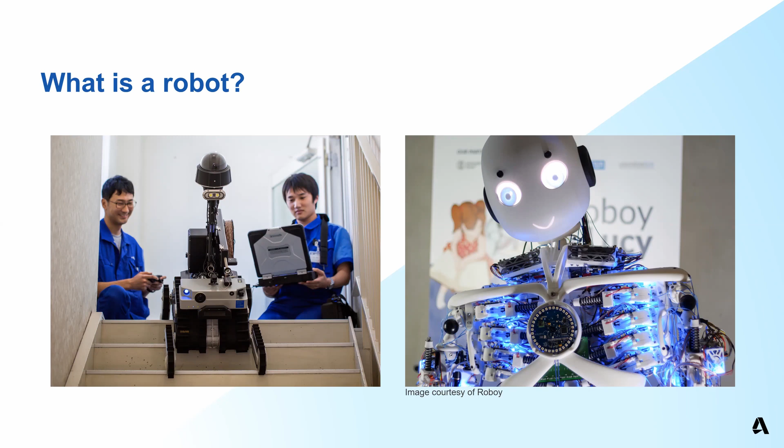We do a lot of making in this world. These robots aren't actually helping us make anything, even though they are a great help to this world. Industrial robots are designed to help us make things. They have the ability to do repetitive tasks that we humans may not want to do or cannot do.

We can see these robots in our technology center, Birmingham in the UK on the left, and the Boston Technology Center on the right. These are able to do tasks such as large-scale milling and large format 3D printing. They're very much like a CNC mill or a desktop 3D printer. So why would we actually look at these robots instead of a larger CNC or a larger 3D printer?

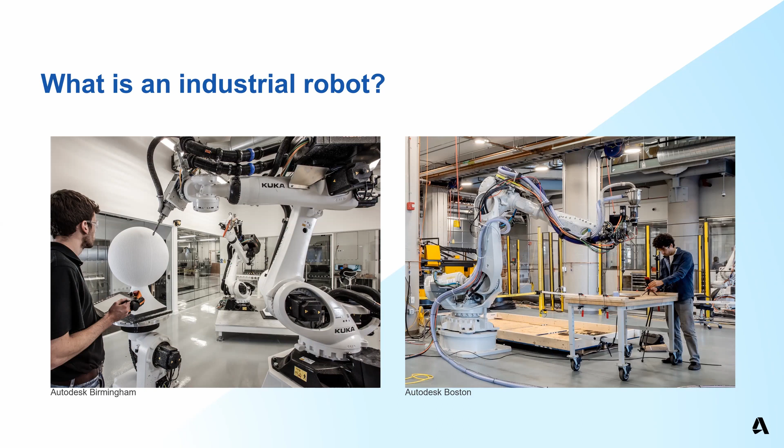In machine shops and production environments, one question always seems to arise. Are we being productive? As a follow-on to that, we ask another question. How can we be more productive? We can then progress to asking more specific questions, such as how can we achieve higher productivity with robots?

We've had a brief look at robots, but we need to diverge for a moment and ask questions that have come up, such as what is productivity? Expressed as a ratio of an aggregate output to a single input, or in a manufacturing sense, what can you make with the finite resources that you have?

So then the next question, what is increased productivity? It's going to be different for every single company, but a few examples might sound like making the part faster, reducing your upfront costs, reducing floor space, a smaller workforce, or many other possibilities. So how can robots, and industrial robots specifically, allow us to have an increased productivity? We shall return to the intent of this presentation and discuss the reasons we would choose a robot instead of a CNC or a standard 3D printer.

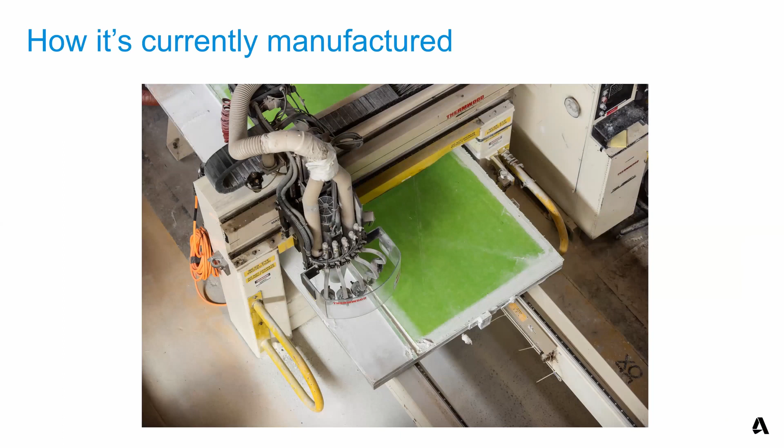The current manufacturing process for the front wall starts as a sheet of laminated material. There's a protective outside and an insulating core that allows us to protect from the elements such as rain, sun, heat, and cold. This sheet is loaded onto a CNC router that cuts the windows and the doors and drills the holes where it attaches to the other walls and also the supporting structure.

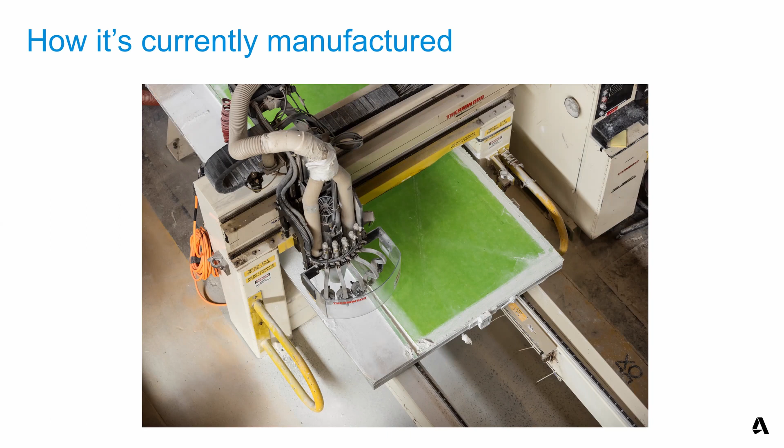Next, the outside dimensions of the wall are cut so that the panel is at its final shape. The last thing to do for this finished wall panel is to remove it from the router, and a new blank can be put in its place. One of the reasons this method is used is that it can be very fast to produce a single panel, and it's very repeatable.

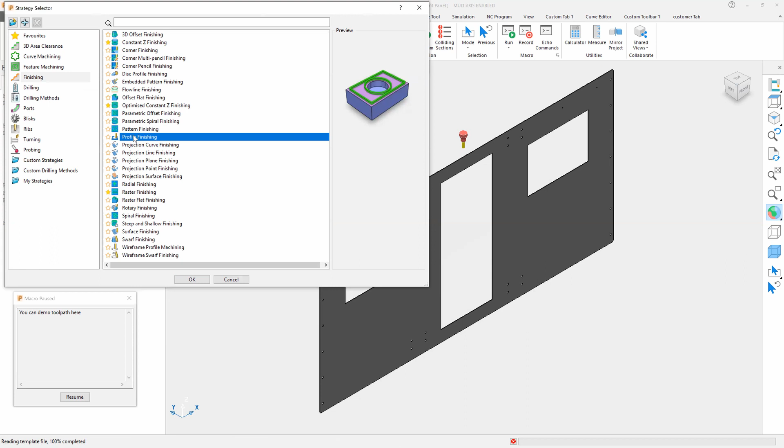As you can see, we've moved the front panel model into our software PowerMill to be able to program the toolpath that will drive our CNC machine. It's a very simple workflow. Start by choosing the toolpath that we will use to cut the profile of our part. And then we follow the linear workflow from top to bottom to be able to align the tool to a specific z-axis or our toolpath work plane.

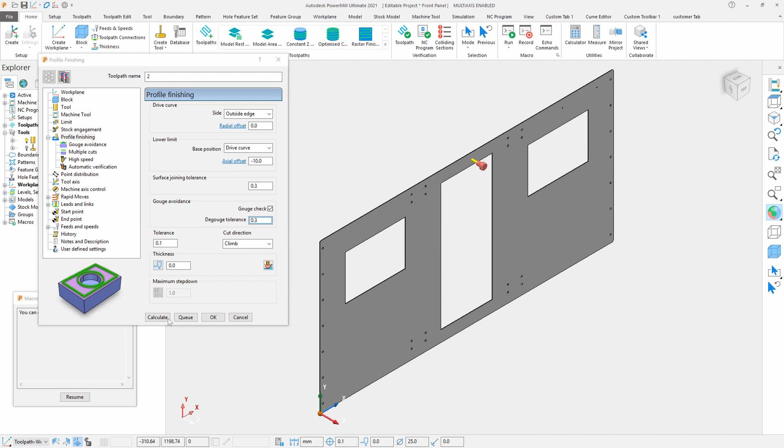We'll choose our machinable area, which in this sense is the entire part. We'll make sure that we have the correct tool, and then move to our settings page to make sure that our tolerances and our actual cutting location is defined. When we press calculate on this toolpath, what we're going to see is that our toolpath shows up as a cutting move in green, and that our red dashed sections are rapid moves from where the toolpath starts and in between each of these sections.

Now, one thing that we can notice here is that our lead in and lead out moves for these toolpaths are in a different color as well, and these can be modified outside of the toolpath if we need to change them. Maybe this height needs to be a little bit higher so that we have a little bit more clearance for our tools. So if I make this, for instance, 150, when I press apply, we can see this automatic update for a longer lead-in.

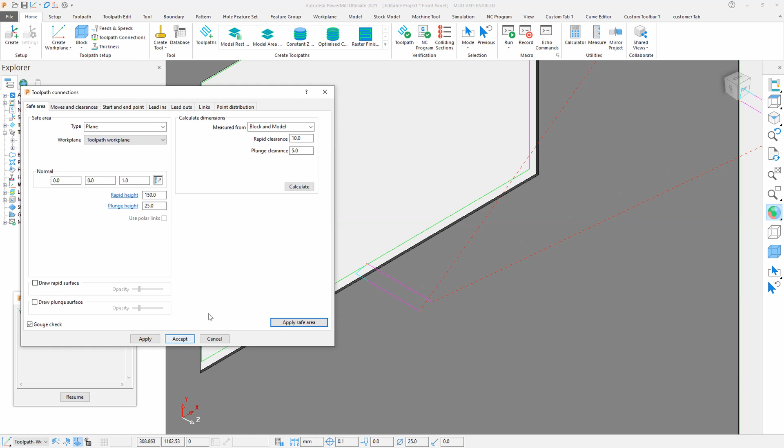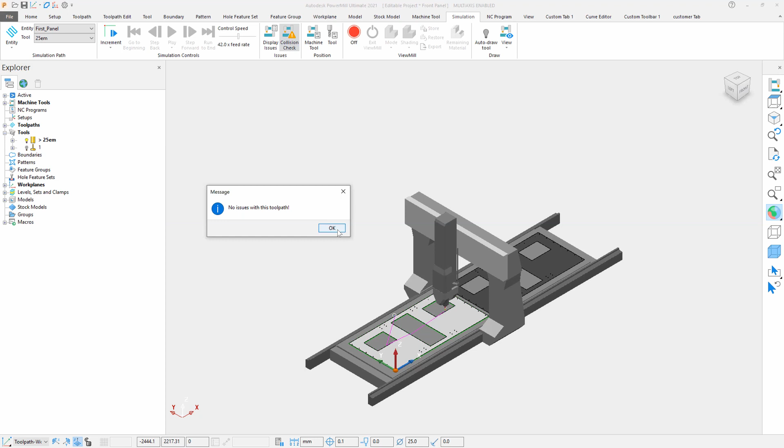Now, putting this toolpath on the CNC machine to watch the simulation, we can see that tool and the motion that this machine will take to be able to cut the outside profile of this part, as well as cutting the windows and the doors. As this finishes up, we will note that this toolpath had no issues throughout the entire part on this first panel. Now, this machine is very long, so we have put a second panel on to this bed of this machine to be able to cut it.

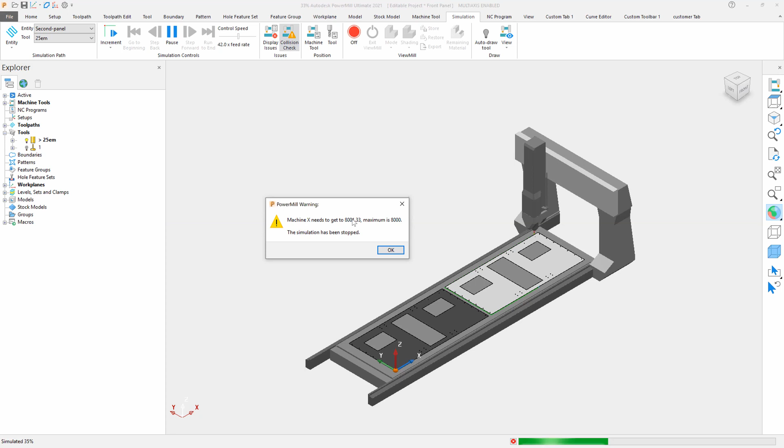Now, this is a very long machine, and what we'll see is that at a certain point, we actually run out of travel on this machine, even though it is so big. This warning message that has popped up has let us know that we have exceeded the maximum travel of our machine, which is 8 meters, by a little bit. Now, looking at that issue that's brought up in our simulation, we can actually see the simulation and the area that our machine is able to reach. So in a sense, this is a great way for me to predict whether this is going to work on the CNC that I have.

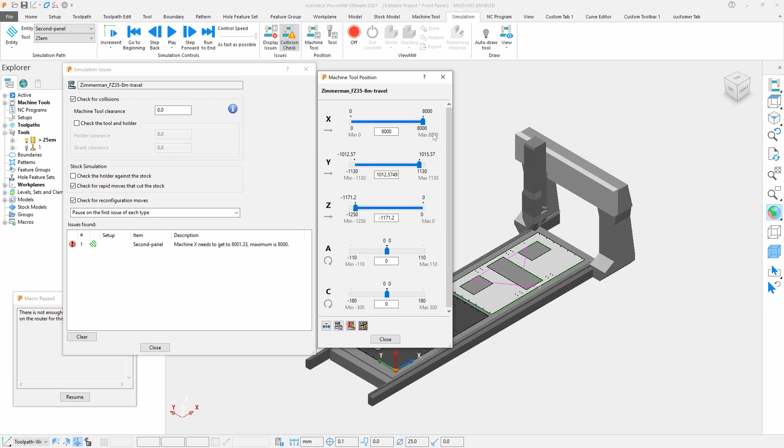In this case, if the panels change size at all, then we may not be able to fit them on this machine. Now, if they do get smaller, that's very beneficial to us. But if they have to modify this to be just a little bit longer, we may not be able to squish them, and we may have spent lots of money to be able to only cut one part at a time. So as we've seen in PowerMill, this is a far improved process from measuring and cutting these holes out by hand, even if it may be power tool assisted.

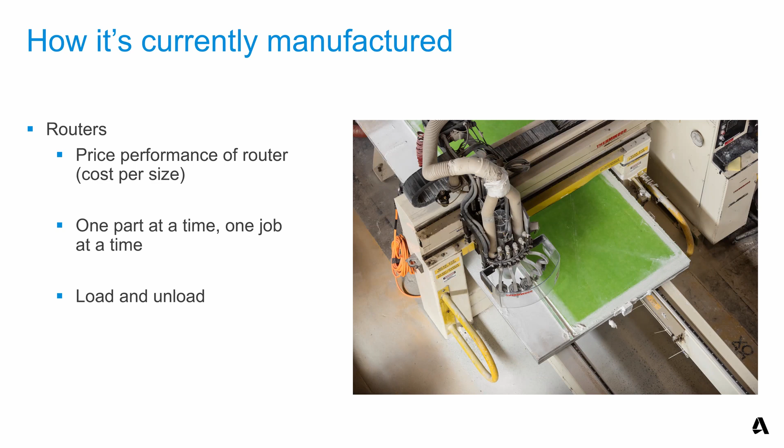I did show that we did have the possibility to show the two panels next to each other, but this still requires an operator to switch programs and possibly change the setup if we have to change from the front panel to the side panels, or to the roof or the floor. One last downside is that the router is not able to cut while someone, a human, is loading or unloading the material. Think about these things, and we'll have a look at the areas where robots excel and where we can see them help in this situation.

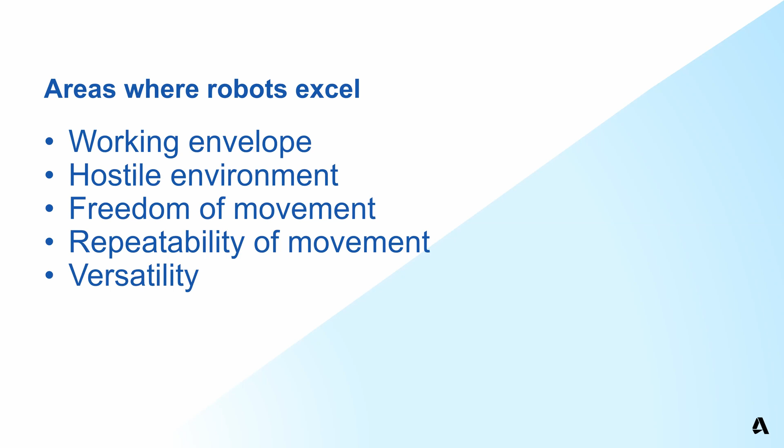In this next section, we will look at areas where the robots can excel. From the working envelope to versatility, robots have the ability to increase productivity with a bunch of other possible areas as well. In the world of traditional machine tools, the envelope size is exponentially linked with cost.

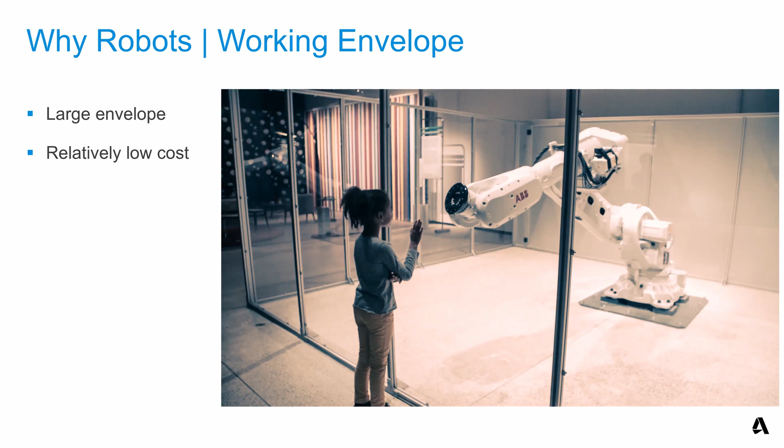That 8-meter machine is going to be so much more expensive than something that's only 4 meters long, for instance. To achieve the envelope size similar to the ones seen in this image would be many hundreds of thousands of dollars. In the case of robots, large working envelopes can be enjoyed for a fraction of the capital outlay. Robots don't necessarily need to be big, though. Smaller robots can actually be just as beneficial due to many other factors, which we'll see in the coming slides.

Irrelevant of the specific job or task, hostile work environments are places that humans don't want to be. Think for a moment about situations such as working with a radioactive or other toxic material. Just being around these and interacting with these materials can cause serious injury, or even worse. How about working on another planet or in the vacuum of space? These are just a few examples to look towards robots as a solution.

Now, robots still need some amount of human interaction to be implemented, but the work in the hazardous environment can be avoided. Reducing or eliminating exposure to these toxic materials can reduce the cost and even possible problematic outcomes. So why do robots excel in hostile environments? It's due to their freedom of movement. Technology and manufactured parts become more complex and intricate. And with this, we rely more and more on automation due to the ability to move the objects more freely in ways that humans can't.

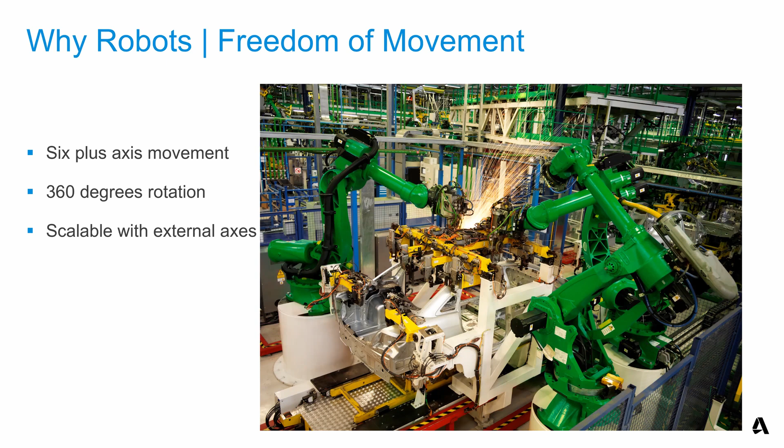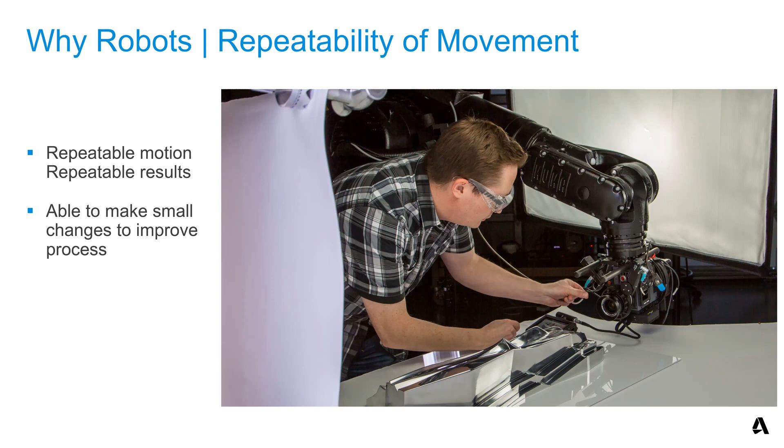Manufactured parts are not the only place where repeatable movement is desired. With the growing awareness and adoption of robotics in all aspects, we are starting to see other industries, such as film and video, utilize robots to have repeatable camera motion while filming a scene. This allows set pieces to be moved, tweaked to get it just right. This also allows actors to perfect their movement or their lines in scenes where that camera is moving. Optimization and perfection in repetition is another way to improve productivity.

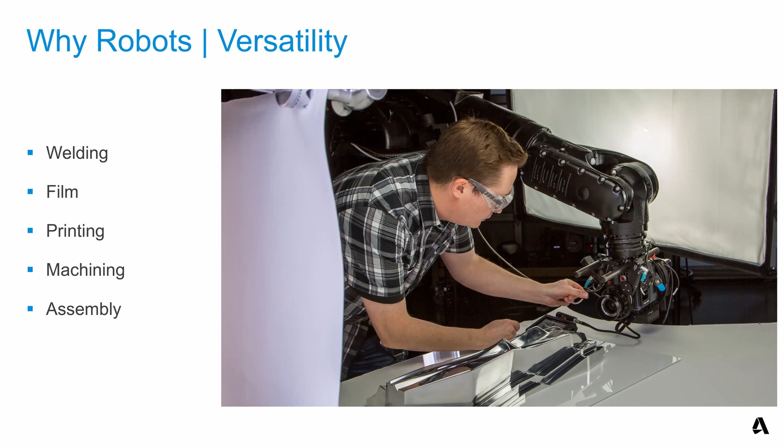This not only is a great example of repeatability of movement, but also the versatility of industrial robots. They're not just for manufacturing and can be used in a lot of different industries. We've seen examples of welding, printing, film, and we'll see more. With the robots used to aid filmmakers, we will note that not all scenes are actually inside a studio, and this brings us to our next advantage, which is mobility.

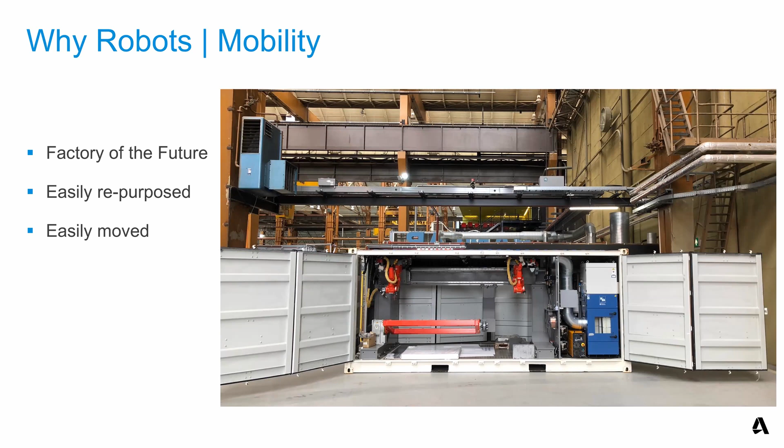Mobility is a key aspect of robotics, which is mainly due to the initial small footprint compared to the working envelope of the robot. Industrial robots can be mounted in almost any orientation as opposed to a CNC or a 3D printer that relies on gravity. This container was created with two robots hanging on a rail and also a rotating table beneath them. This container is easily transported as a microfactory on the back of a truck or a lorry, depending on where you're from.

This set of robots is purposed with directed energy deposition end effectors, specifically WAAM, wire arc additive manufacturing, intended to work together as a team to produce metal components quickly. These can be critical components on a construction job site or a repair component where shipping the replacement would take far too long or be just too costly to ship. Think about being in the remote center of a desert or in the middle of an ocean. Both of these are examples of just-in-time manufacturing.

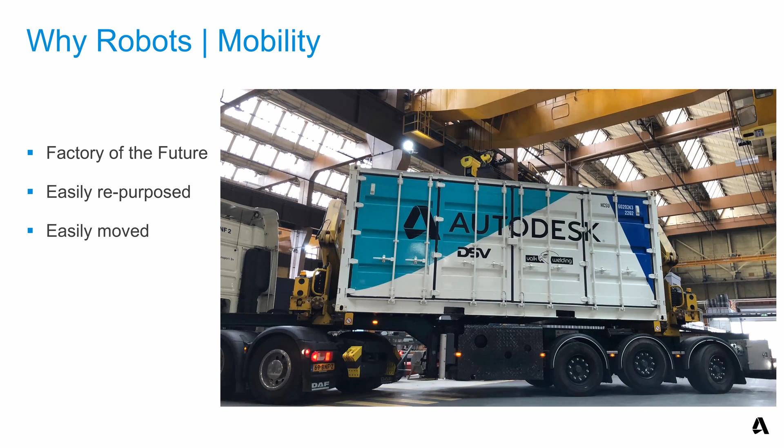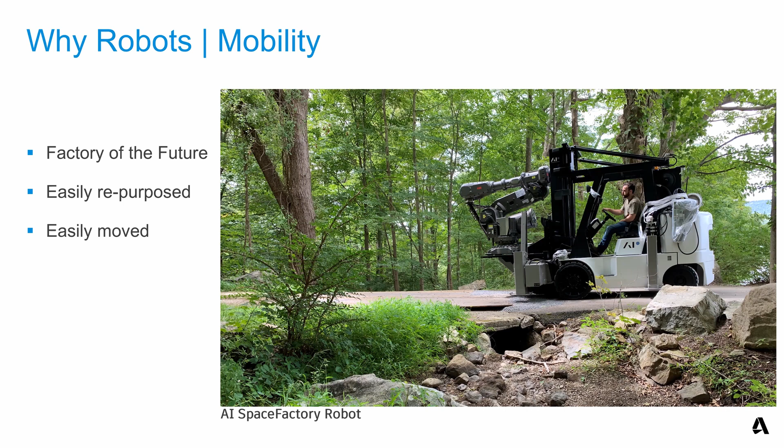Another example that joins a few of these is portable building robots. It's a test here on Earth for printing habitats in other worlds, bringing together mobility and overcoming hostile work environments off-planet. I mentioned earlier the end effector of the container robot. You can see it here close up. Notice there's actually two parts on this end effector: the first being the WAAM stinger on the left side, and the second being a plasma cutter on the right side.

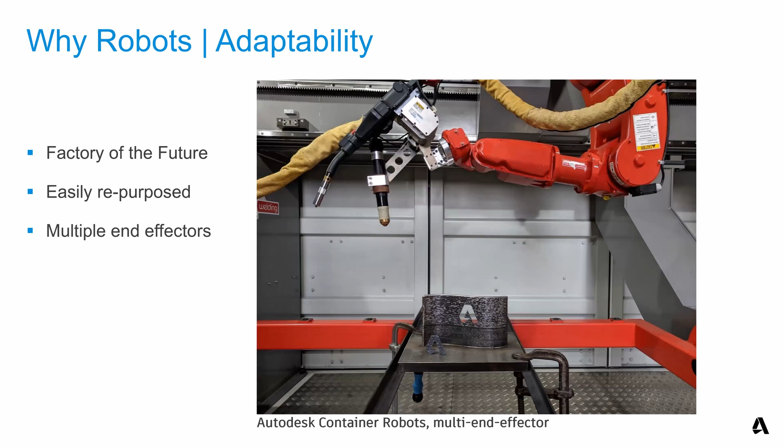Adaptability, which is nearly synonymous with versatility, but in this sense, it means that because the end effector of the robot can change, it's very easy to repurpose this robot to perform another different task. This example shows two tools on the robot end, but there's also the ability to change the end effector on the fly, such as that in our technology centers.

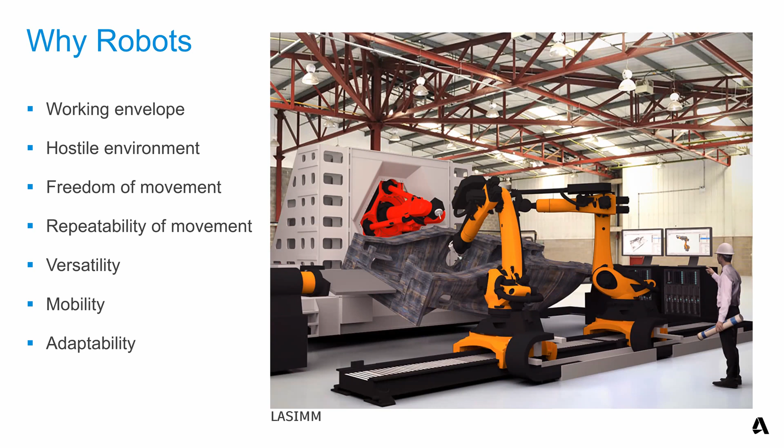What are the key aspects in our example that we can use to increase our productivity? Let's have a look. Utilizing the robot on a rail, we can actually optimize some of the floor space where these panels are being produced. We can also change the orientation of the panels to further reduce floor space and make it easier to load blank panels and unload the finished parts.

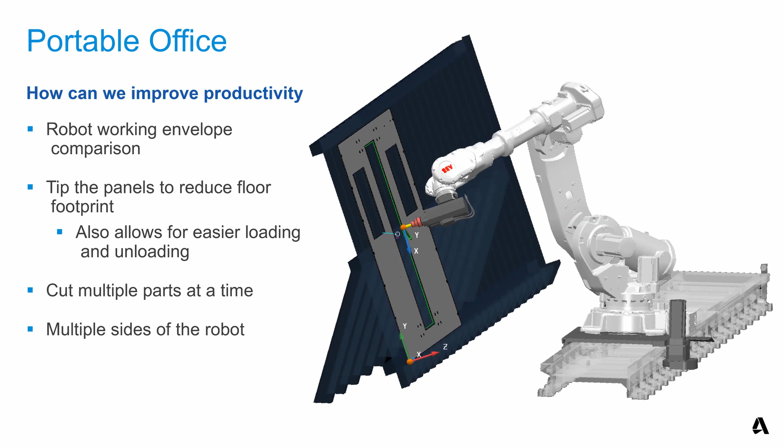Having the ability to move the robot on the longer rail gives the ability for 2 or more setup areas. This means that multiples of the same part can be cut at the same time, or alternatively, multiple jobs can be set up at once. For instance, cutting one of each of the walls. A cell could feasibly complete all of the wall sections required for a modular office in one cycle. Both of these ways will improve productivity.

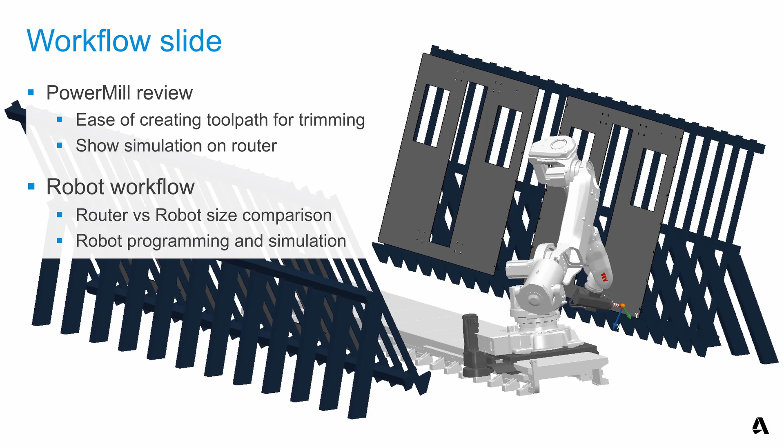You'll remember that we showed how easy it was to create that toolpath in PowerMill and the ability to simulate to see issues before we send this program to the shop floor. To demonstrate what these processes look like for the robot, we're going to step back into PowerMill and show the comparison of the size on the router, robot programming, and also the simulation on the robot. In this case, we've overlaid and superimposed that router on top of our robot.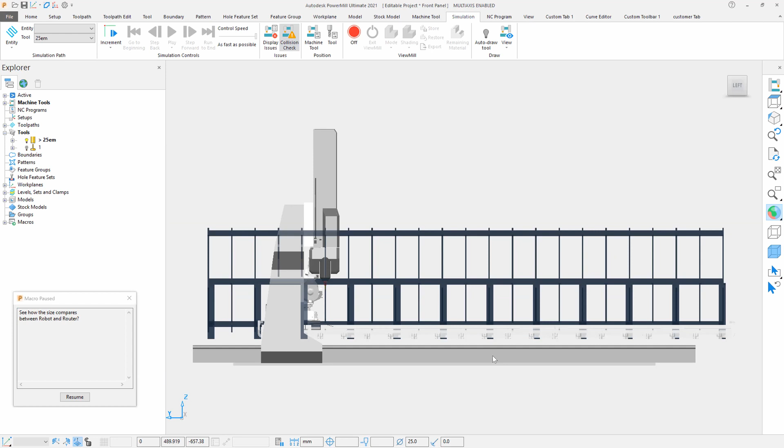And as we can see from this view here, our robot with 2 walls is just slightly wider than our mill. And if we were to look at the left view, we can see that they're really pretty close to the same length as well. We do save a little bit on the height, but for the most part, we can come to the conclusion that for the same amount of floor space of the router, which we were having trouble fitting 2 components, we could fit a lot more. So now that we've actually put the part on the robot, we can see all of the extra space on that wall to put more components.

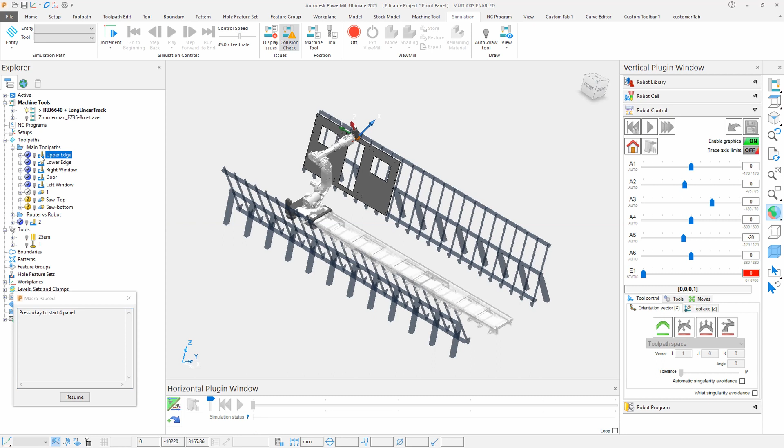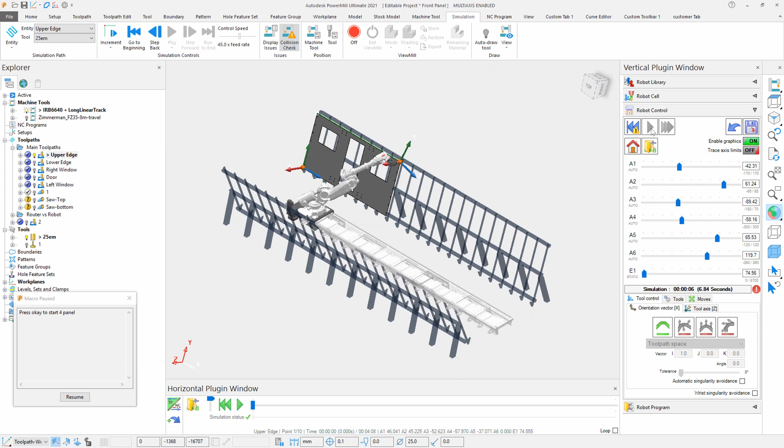We're going to start with programming just one small toolpath for now, which is the upper edge of our front panel. With this, on our right side, we can see our vertical plugin window has the robot controls, where I can attach the tool to the start point and then press play to watch that simulation. Now we do see that this robot is able to machine this entire component without too much movement, but it may not be the most optimized movement that we want to see for this robot.

We can utilize that linear rail to be able to reduce a lot of the motion that that robot sees. Changing the priority of that axis to high and reattaching that tool, we can see that there's a lot less motion of that robot to cut that top portion of the panel. We would then save this simulation and load it into an NC program to then send to the robot.

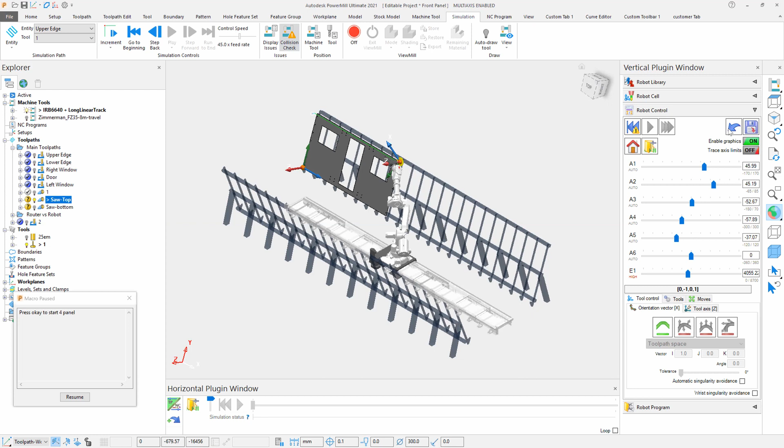I want to talk about a quick digression, because one of the ways that robots can definitely speed up our process and make it a little bit better is the ability to just turn the tool and be able to utilize a saw to do the cutting. So if I zoom in real quick, we can see that a saw blade is going to be able to come in and cut that top edge very easily and very similar to the previous component, but it's going to give us a nice straight edge.

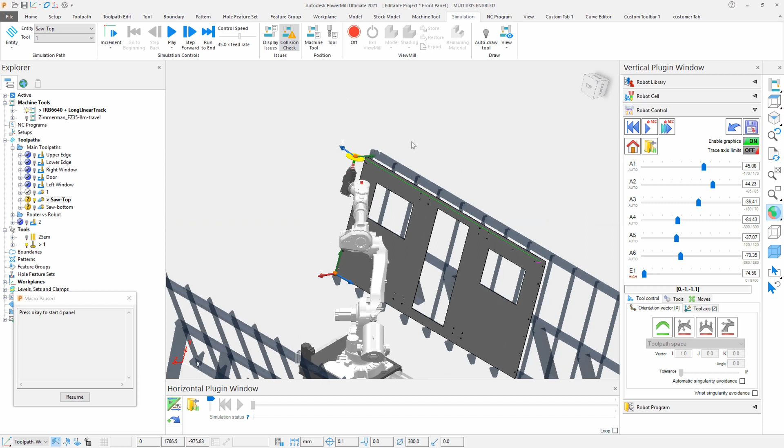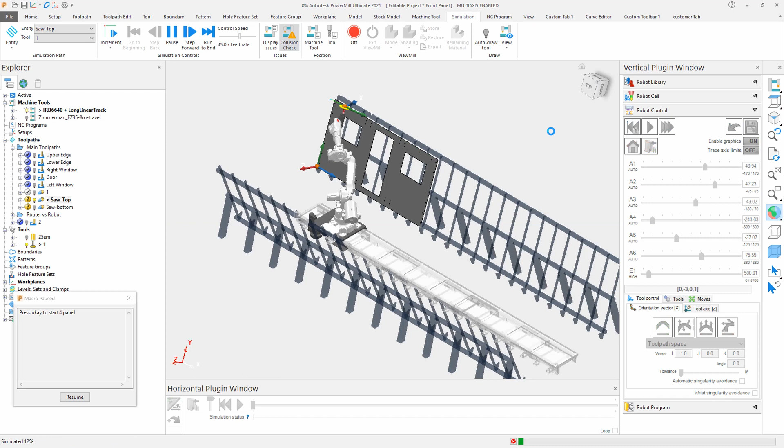Similar to the previous way we did this, we attach it and press play, and our robot is going to have a similar motion to the one that we had prior. If I reattach it and change that axis priority and press play, we can see that we do get that nice, much smoother motion on that linear rail, just to keep the robot static and move that tool. This is another way that we can think about other tools that will help us improve productivity that may not be available on a CNC mill.

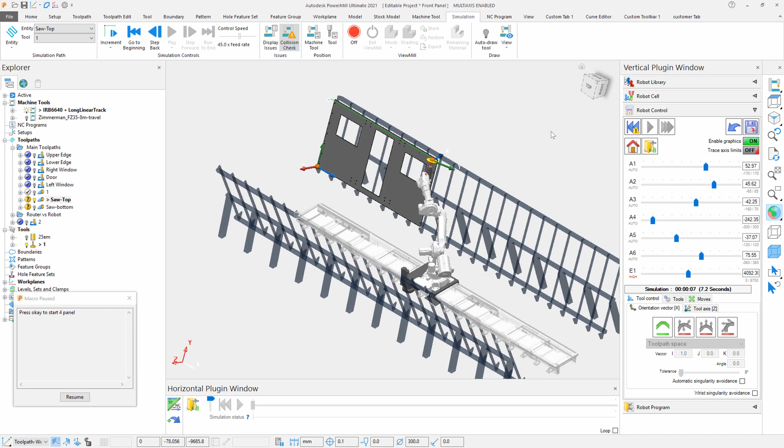So quickly, I'm going to step into another project where I have all of these panels put together. And I'm going to work my way through to the robot program where I can right-click and add toolpaths. So we'll start in this case with the upper edge and add that toolpath.

At this point, we can use our window at the bottom to be able to view how the robot is going to move along the path to get to our start point of our toolpath, and then actually machining of that toolpath.

What I did is I actually have this as a saved program. So I will just load all of the different portions of toolpath that will be required to machine all of these different panels at the same time. With this, I can see that my toolpath is going to step through and actually start to do the drilling as the first portion of this toolpath.

And it'll move along from panel to panel to panel, reducing the number of tool changes required and doing all of the drilling operations followed by the milling operations. Stepping through this, we can see the different areas where the programming steps have changed to be able to follow along with our part.

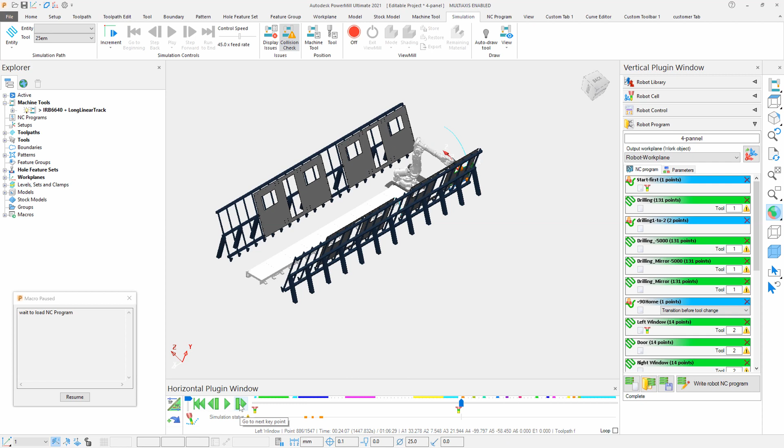Once the tool change happens, we then are able to machine the door and window components and move point to point to point and have our simulation where we can see if there's any issues before we send this to our machine on the floor.

So we've seen the improvements that can be made in changing from a router to a robot. But what else can we work on to improve our productivity? One way, we could introduce scanning or probe inspection during the manufacturing process to allow for quality monitoring.

A second method might be to change the end effector of the robot to be able to automate the loading and unloading of the finished components and the raw material. This would allow for a truly lights-out manufacturing cell. What about other methods? Can you think of any?

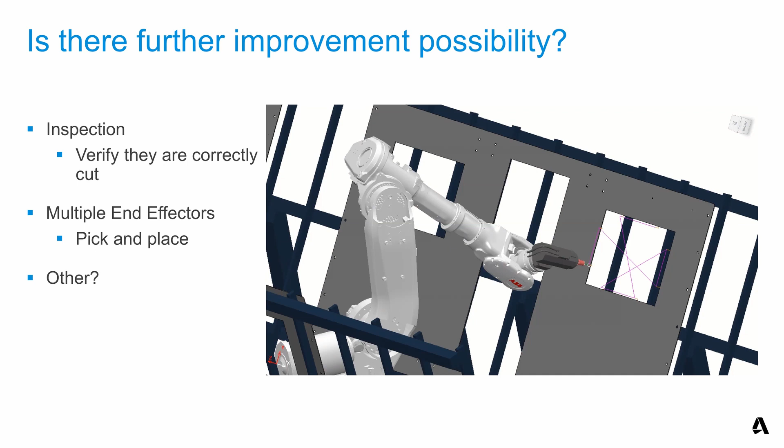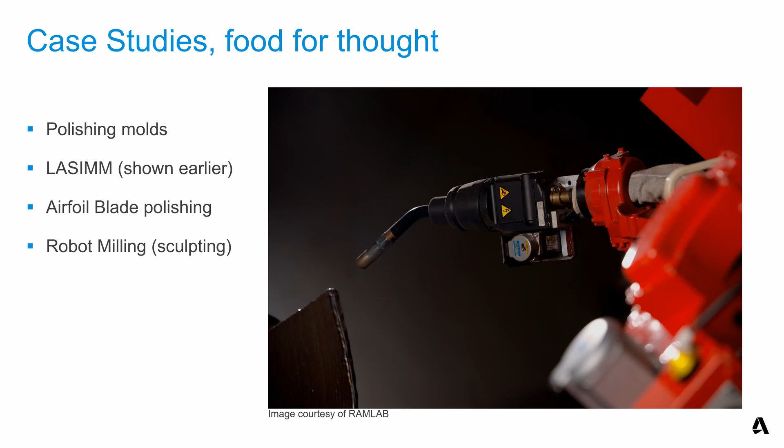We've got a few case studies to follow that we have worked on that may help you ponder on this a little further. In the next few slides, we'll see the following areas where the robots have helped increase productivity. The first one we're going to address is polishing molds. The second, LASIMM, which is a large additive, subtractive, combined machine. We'll then look into airfoil blade polishing, and lastly, robot milling or sculpting.

My name's Sam Wilkinson. I work in the Specialist Modelling Group at Foster & Partners. I'm Josh Mason from Foster & Partners in the Specialist Modelling Group. Foster & Partners is a global studio for sustainable architecture, urbanism and design.

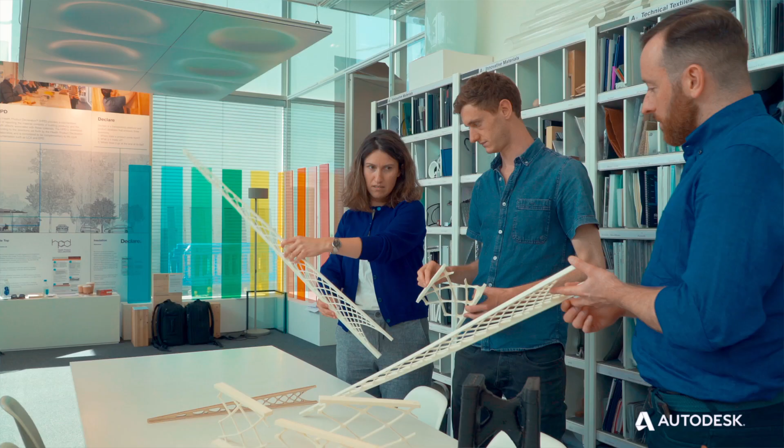Over the past decade, we've been investigating advanced structures and material optimization, the use of steel, concrete and plastic for large-scale additive manufacture, and technologies behind this, such as robotics and digital design software, and other technologies needed for future applications like extraplanetary habitats on the Moon and Mars.

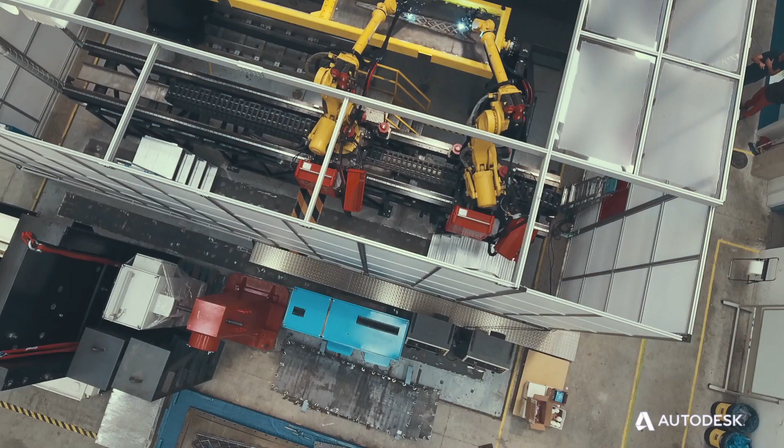Which brings us to LASIMM, which is an EU-funded research project with a consortium of universities and companies. LASIMM stands for the Large-Scale Additive and Subtractive Integrated Modular Machine. As part of our role on LASIMM, we designed a high-performance steel cantilever beam, taking inspiration from Maggie's and Crossrail.

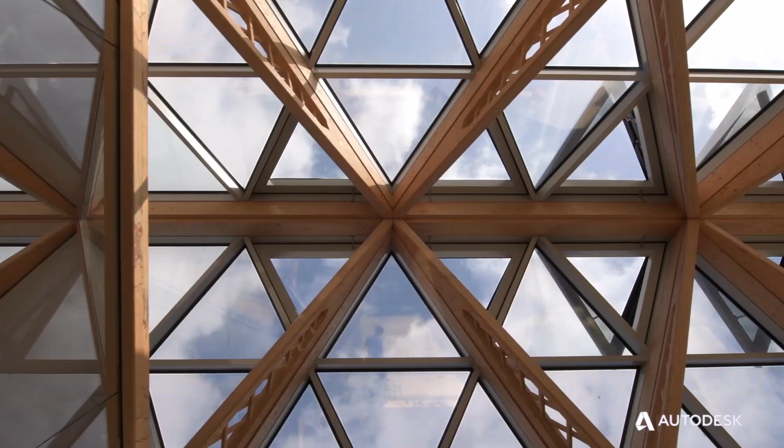As well as being a driver for the design of the machine, we wanted the part to be adaptable for different sizes and structural loads for mass customization, and to illustrate the internal structural behavior of a cantilever beam. We have been developing new approaches to structural optimization and generative design, and experimented with generative Autodesk software.

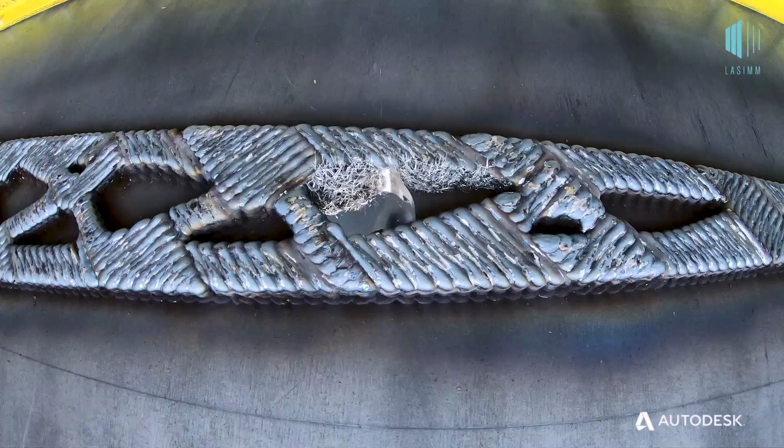The mission of the project was to develop a hybrid machine, one of the first, combining additive and subtractive manufacturing with the extended capabilities needed for surface treatment and inspection of the parts being manufactured. The LASIMM system is based on wire and arc additive manufacture, WAAM, which has a relatively high deposition rate, up to 10 kilograms per hour compared to other 3D printing technologies.

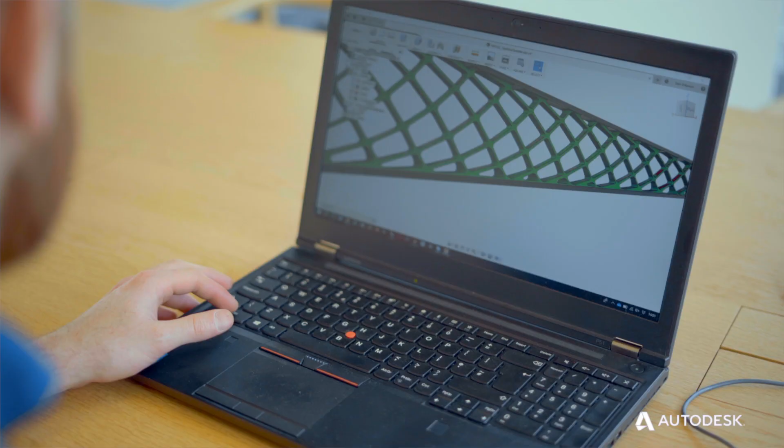Our role at Foster & Partners in the consortium was as an end user, where we worked with Autodesk and the other partners to develop a new design approach incorporating all the manufacturing constraints and a demonstrator part to show its potential application in the construction sector. The aim of the consortium is to make fundamental steps towards transforming the construction industry by developing new manufacturing technologies.

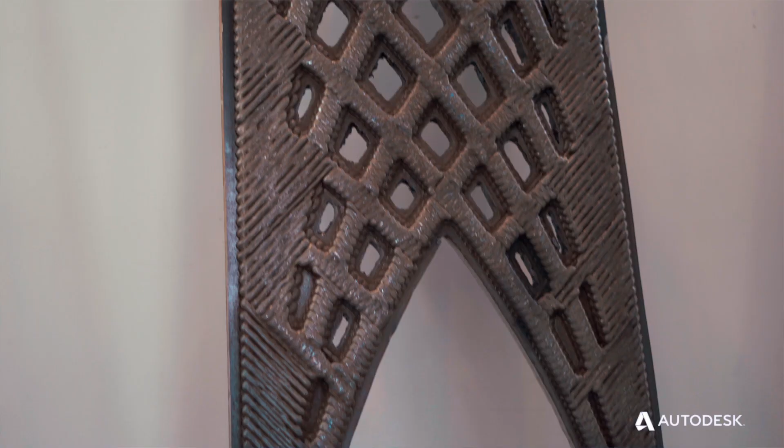After LASIMM, our next steps will be focused on developing the supply chain to deliver at scale on live projects and pushing the software to analyze and generate complex geometries. With LASIMM, combining everything into one machine, we were able to truly develop additive and subtractive, which gave much more interesting opportunities for shape and form.

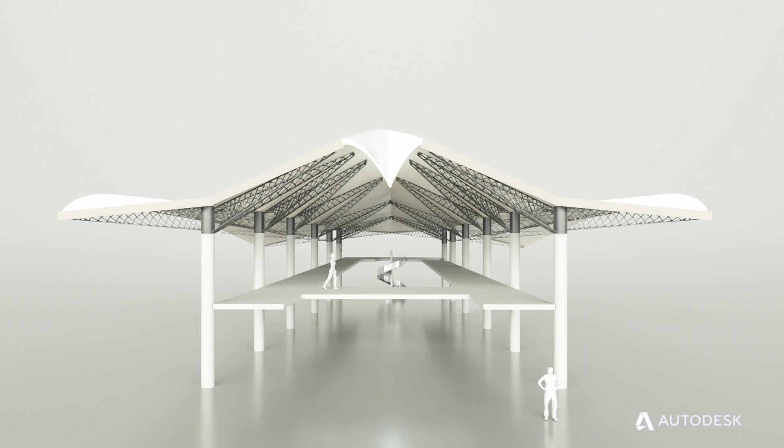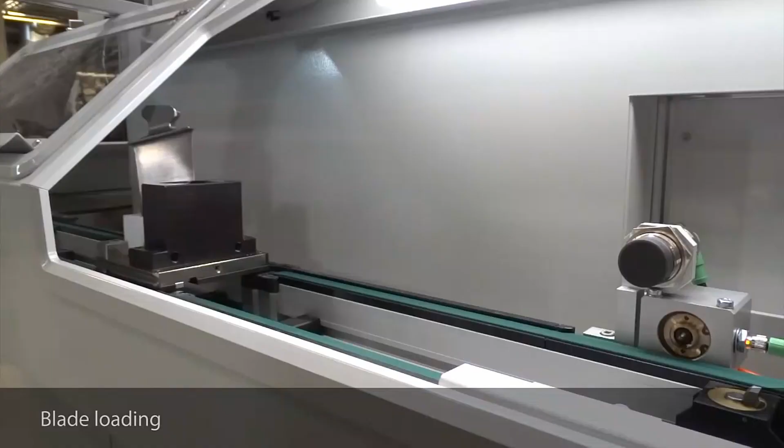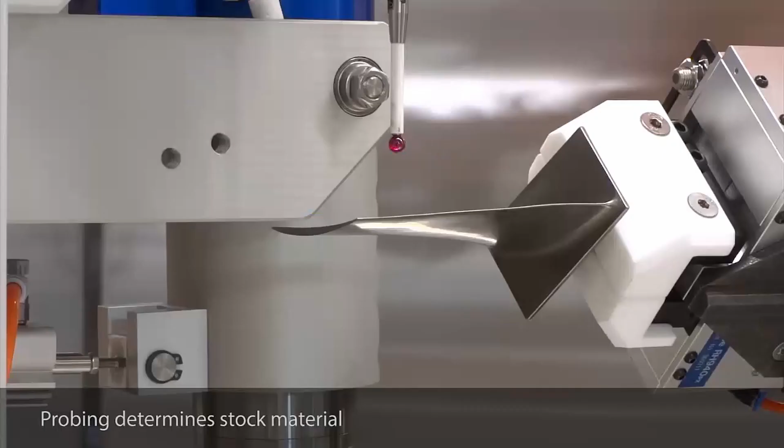So in this next example, the blade polishing, we can see that this robot cell is fully automated. The robot comes, picks up the part off of a conveyor, moves it over to an inspection probe where it actually inspects the part to see if it is at the correct size. Once those results are processed through computer automation, we actually then do the program for this specific blade to do the polishing. This is then simulated to make sure that it is correct and then run on the machine. Again, a fully automated process.

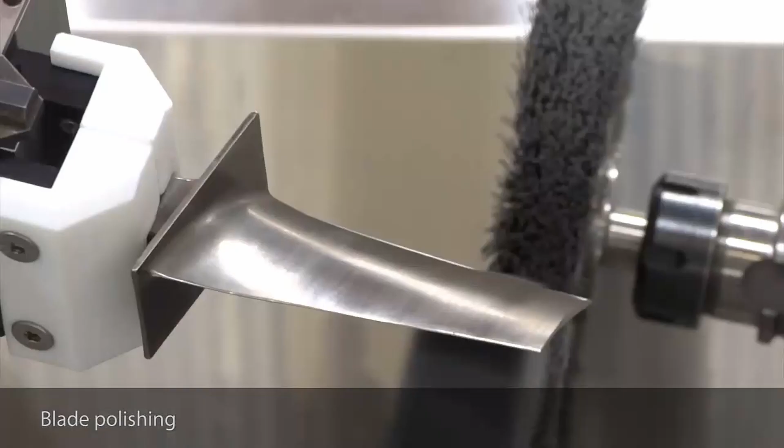Once the blade is fully polished and finished, a second inspection is done to verify the work, and then the blade is replaced to then start this entire cycle all over.

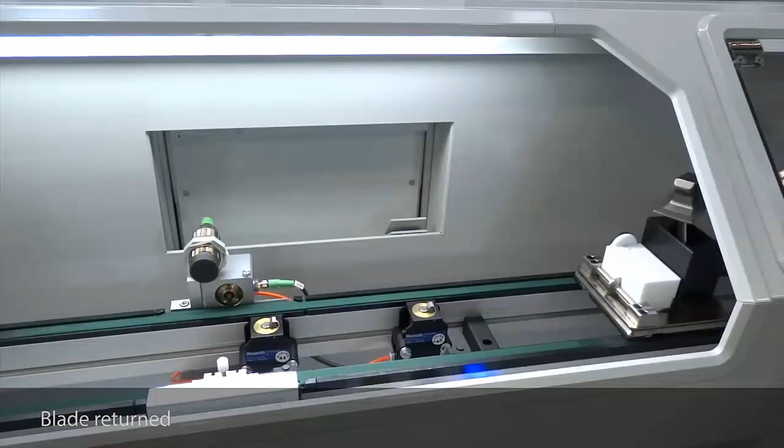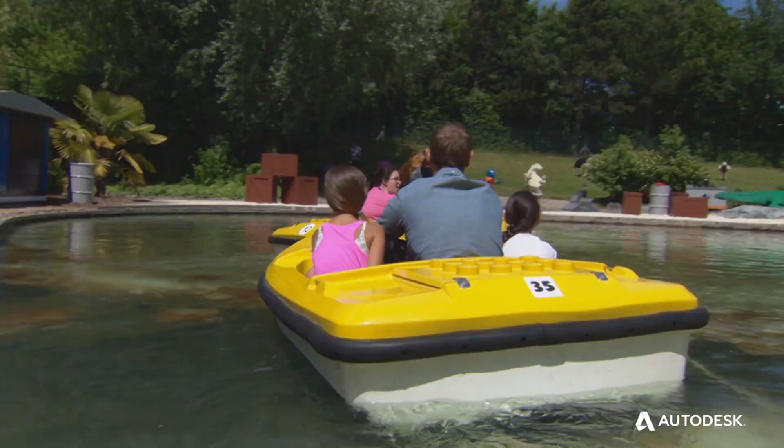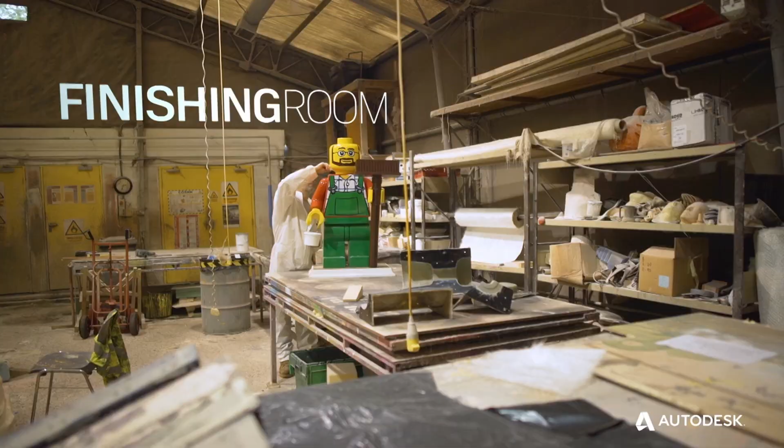Merlin Entertainments is an entertainment business that we support from here, based in Alton Towers, called MMM Studios North. This particular site has been here for 25 years, servicing the theme park and resort industry. We get pulled in from all across the world to bring these themed environments to life. I think what makes Merlin Entertainments unique within the business is the array of brands that we deliver to the general public. We're dealing with more and more key brands now in the marketplace, and being able to deliver exactly what they give us, as in their image or their expectations. The whole process of using PowerMill has been able to enhance that and help us do that.

Everything that was made for attractions was done by multi-skilled, highly skilled professionals like sculptors and prop workers and joiners. These skills are getting increasingly difficult to get hold of nowadays, and even more so when you're dealing with IPs. What they give us as a digital file, we can program into the machines and they cut. So what they give us, they get. So there's never any argument now over pose or posture.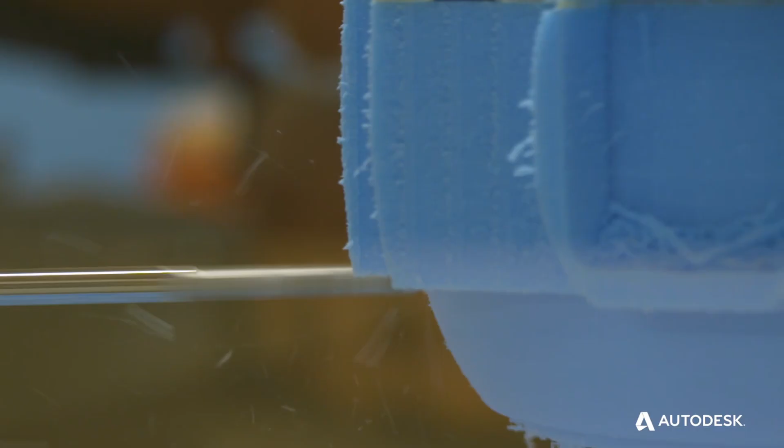When we're using PowerMill, it's brilliant. We import our model and that is it. We are cutting that model that they have given us. So it works perfectly with it. You know, it helps us get everything right and to how they want it.

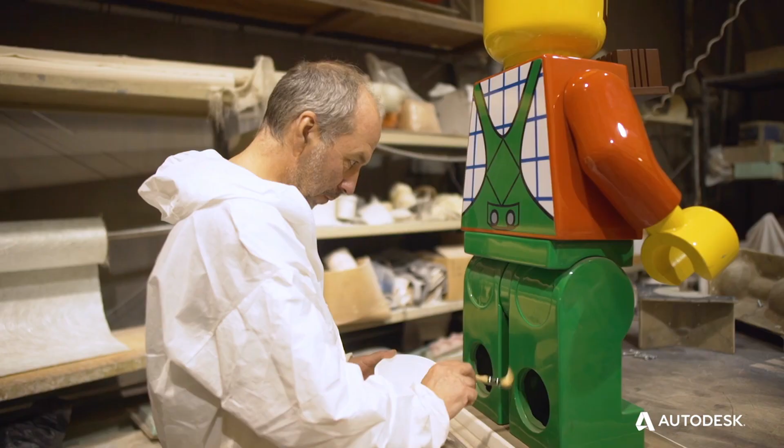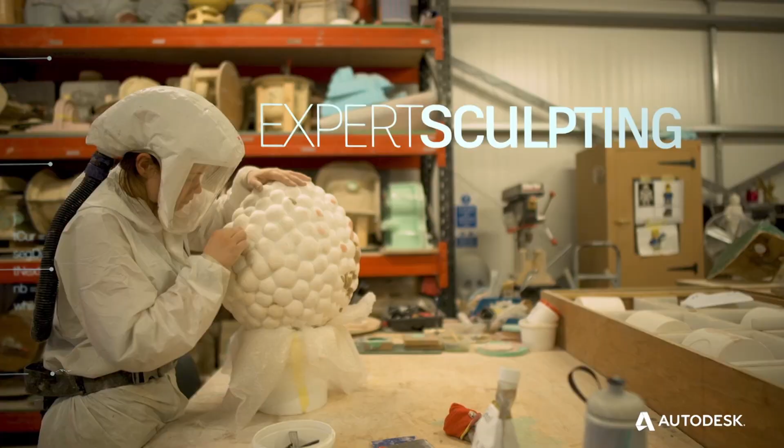I think the key component to delivering projects is down to the staff and their total commitment to the product and the Merlin brands. You have to immerse yourself within it to make sure it's the best product it can actually be at the end of the day. A lot of people that work here have children that love the shows that we're working on, and we're just desperate to make sure that comes through and we produce a product that is that good.

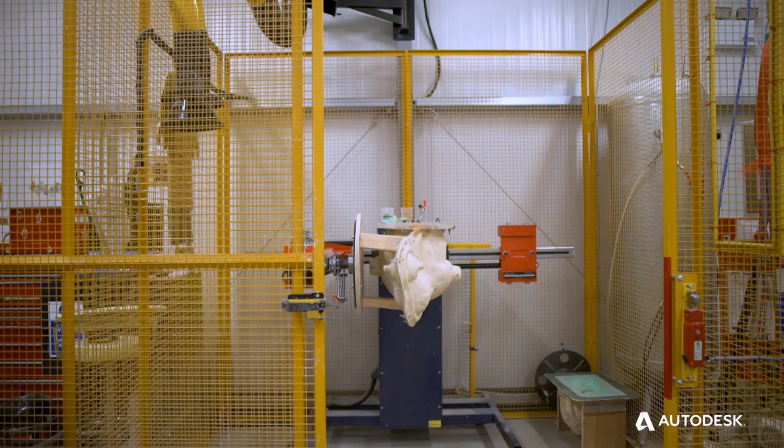I think Autodesk enhances our whole business, certainly at the front end, through our joinery and sculpture departments, where it's totally mechanised the whole of our production and the way we deliver the product. It's made a world of difference. We no longer have that element of, is this right, is it wrong? We can get the asset files straight from IP holders and produce those characters exactly as they should be, which means we're happy, the clients are happy, the IP holders are happy, and we can move on and really make a really good themed environment.

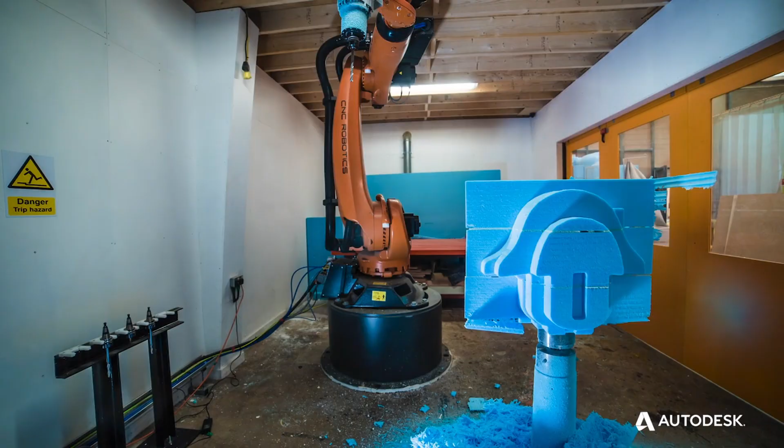Before we made the leap into the digital age, we spent many months looking at different packages. We found that Autodesk delivered the best for us. Working with Autodesk has been fantastic. We're really excited to see future implementations of 3D printing and seeing how the software collaborates with that. And also the cloud system. Other offices within our business can collaborate all on one project at the same time.

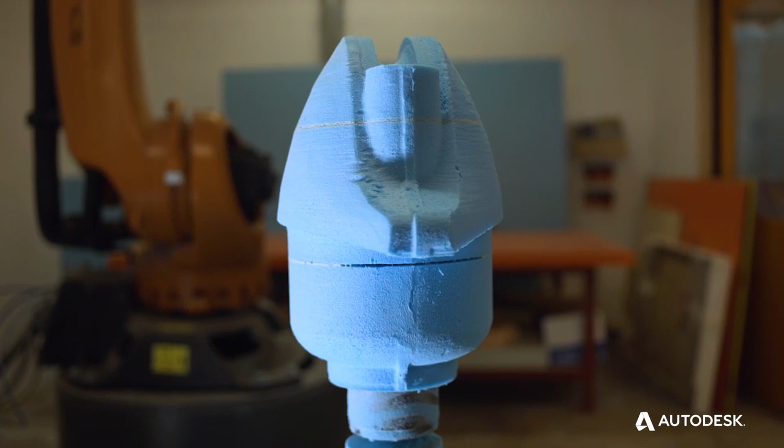ArtCam and PowerMill have been the saviour of this business in the last 4 years, because I think if we hadn't moved with the times, we'd be out of business because we couldn't compete. For anyone considering Autodesk, I'd say jump right in. I think PowerMill and ArtCam are the way to go, certainly within the 3D modelling industry. They put out a fantastic product, the support's there, the overall package is just definitely worth going for.

So after seeing the possibilities to increase productivity with industrial robots, it's quite easy to see the bright future and the many ways that industrial robots can help you now.